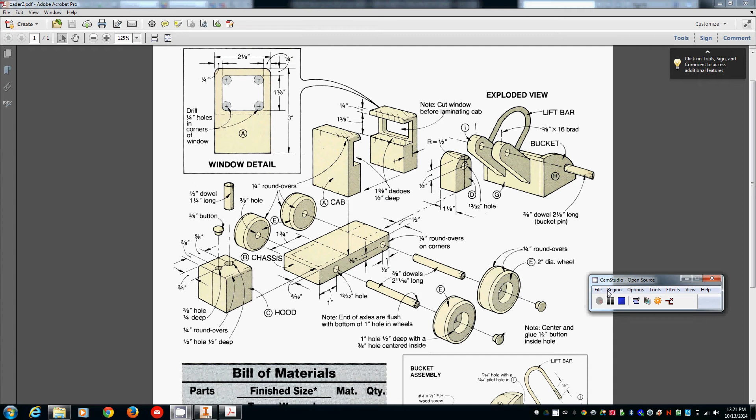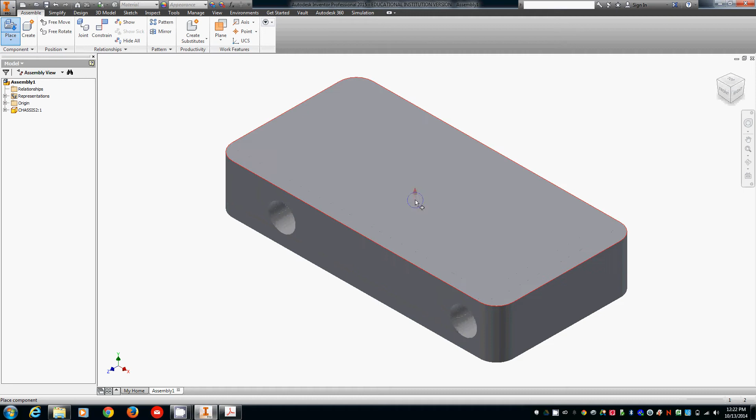In this video I'm going to show how to assemble the heavy hauler loader that all the parts have been made for. So we'll start with a new assembly in Inventor, and inside that assembly I'm going to place the chassis. I'm going to rotate my view to the same orientation that it would be in the drawing and set that as the home view.

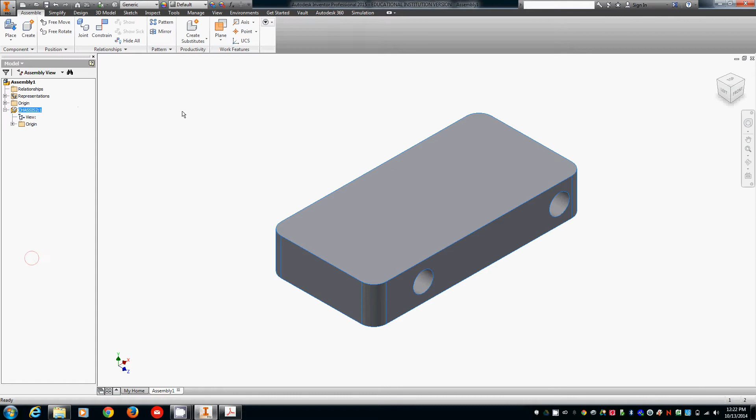And then also, if your settings do not have the first piece to be grounded by default, then you want to right click on it in the browser and make sure that it's grounded. That way that piece won't move around. Now I'll put the cab on top of the chassis. I made the cab as a single piece, so I have to find that. And place it in the drawing. Then I can assemble it with a few constraints.

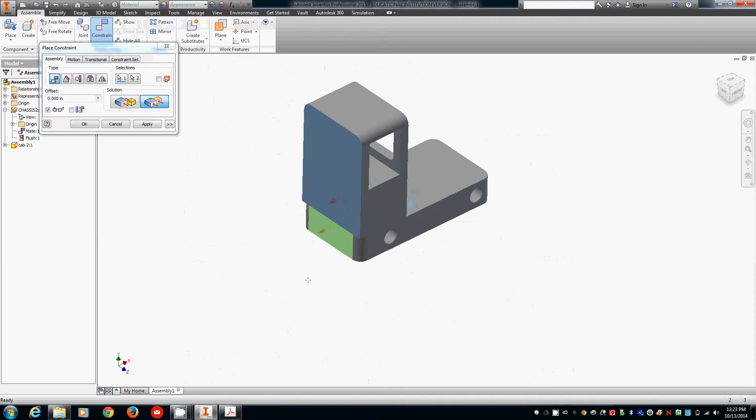I can do a mate constraint for the bottom of the cab to the top of the chassis, and then flush constraints for the side, and also a flush constraint to the back. However, it's not 100% flush constraint because it is 1 3/4 of an inch from the back. So I'll add a 1 3/4 inch offset, and that will place it where it needs to be.

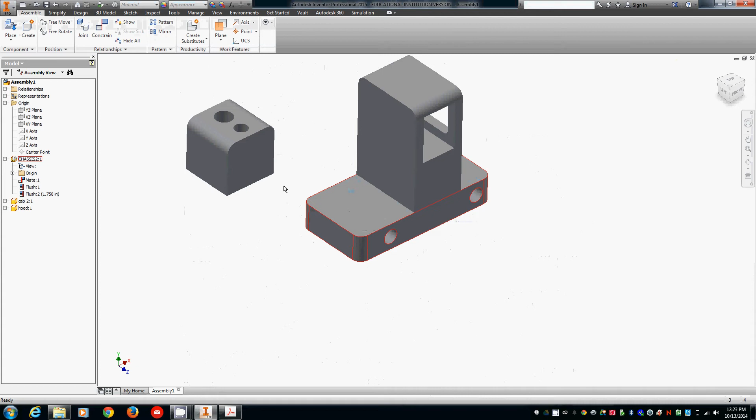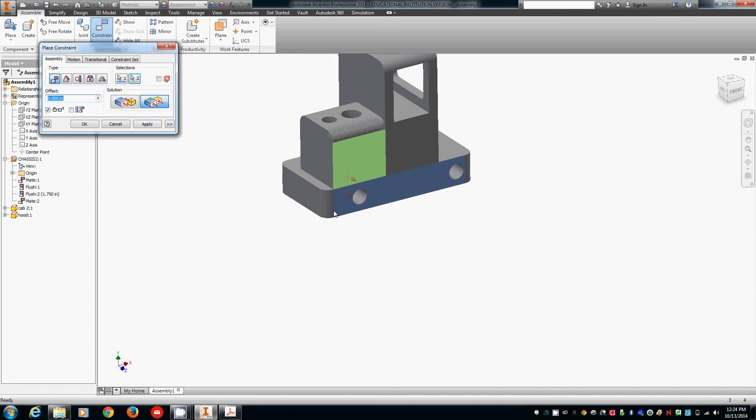Next I'll attach the hood. According to the plan, the small hole in the hood goes towards the back, and there is a 5/16 of an inch gap along the side, and it's mated to the back of the cab. So I will place a mate constraint on the bottom, onto the chassis, onto the back, and then a flush constraint with the side that's offset at 5/16 of an inch. If it goes the wrong direction, you simply can change that positive value to a negative value, and it'll place it where you need it to be.

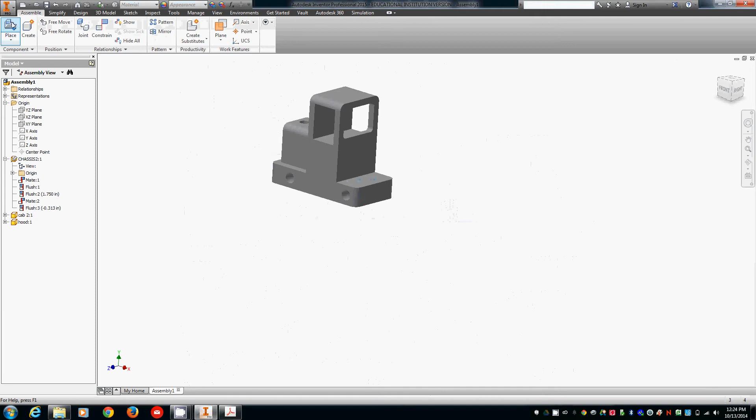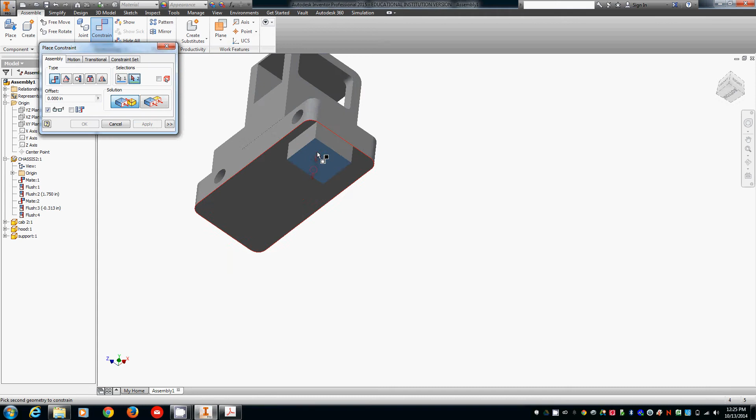And then rotating around to the front where the support goes. That support goes on the front, centered there, offset by 1/2 inch, and flush with the front and mated to the cab. And a 1/2 inch offset here.

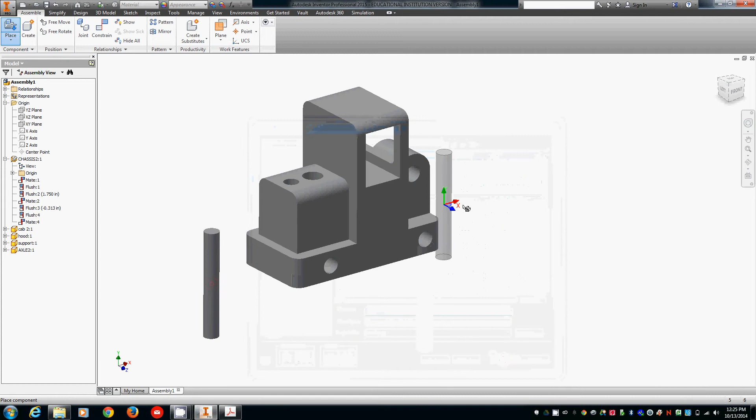Next I'm going to place axles and wheels into the chassis. So I'll get 2 copies of my axle. For this I'm going to use an insert constraint. An insert can either be opposed or aligned. I'm going to want aligned for this one, and it aligns 2 circular features along their central axis. So for instance, this circular feature is the end of the axle, and then the circular feature, the hole, it will align those along the axis.

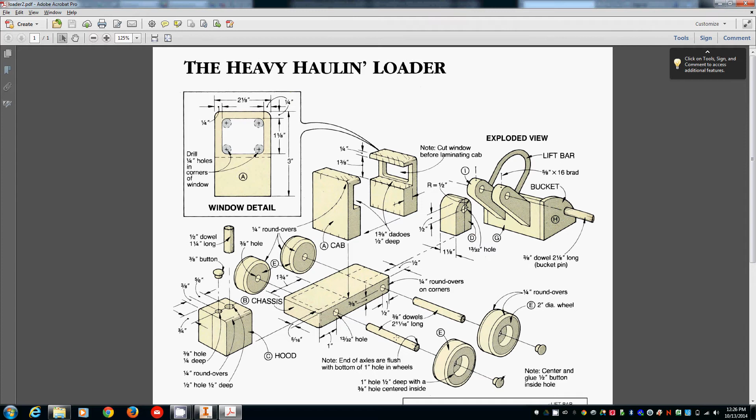However, it's too far. We need it to stick out on both sides the same amount. So looking at the diagram, the chassis is 2 1/8 inch wide, and the dowels are 2 11/16 inch long. So the difference between those two values divided by 2 will give the exposure on either side. So 2 11/16 minus 2 1/8 is 9/16, and 1/2 of 9/16 is 9/32. So I'll simply put in the value 9/32. If it goes in further than out, I simply need to put a negative in front of it. And that worked.

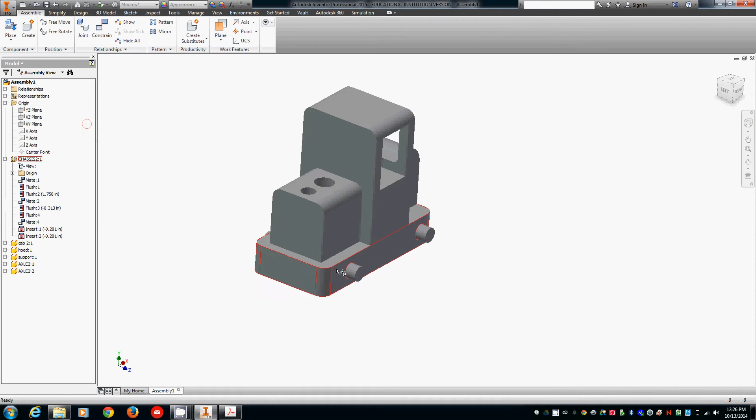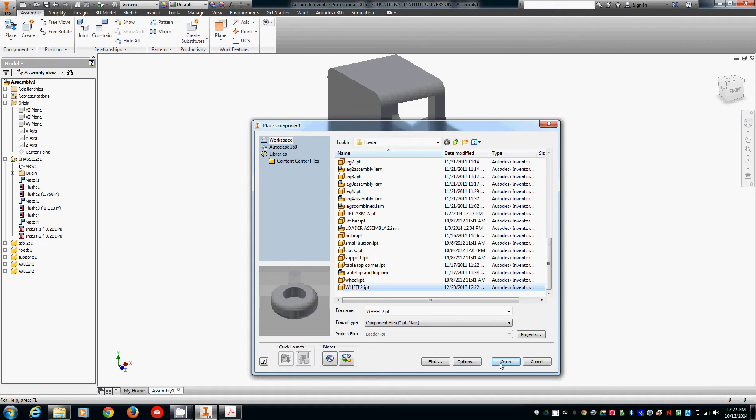Same for the other axle, and a negative 9/32. Now it's hard to tell because it's all one color here, but these axles are now constrained along the axis, but they can still turn about that axis. Now we'll do wheels. I need the wheel 4 times. And I'm going to use an insert constraint once again.

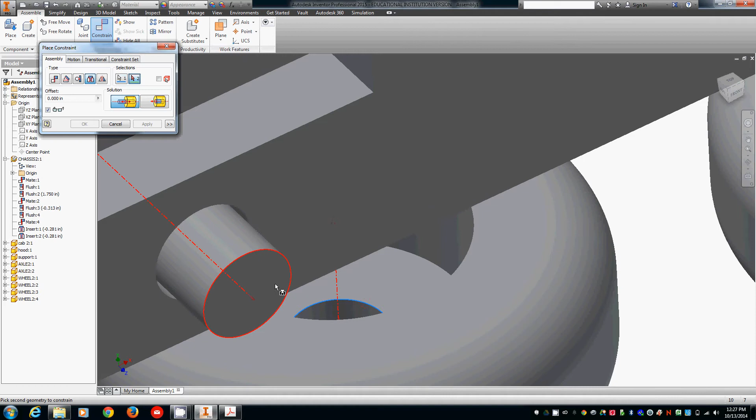You have to be careful though with something like the wheel to make sure you're choosing the right circular feature to align. So I'm going to choose this circle which makes up the inside of the hub and then the end of the axle here. However, for this one, again, I don't want an opposed, I want an aligned constraint. I'll do the same for the other 3.

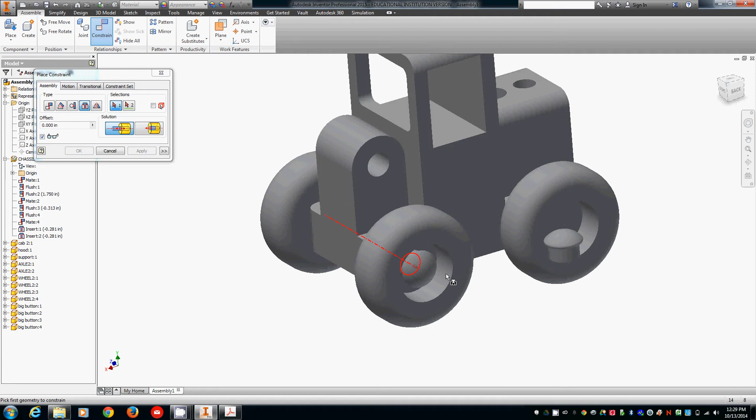Now I'm placing the buttons onto the wheels, which act like hubs. They are assembled with inserts as well. I've done 3 of them already. This time, however, it is an opposed insert constraint. And it's as if you were gluing these buttons right onto the ends of the axles. So I'm choosing the circular feature that's the bottom of the button, and then I'm choosing the circular feature that's the end of the axle or the center of the wheel. Either one actually would work. And that will align it right where it's supposed to be.

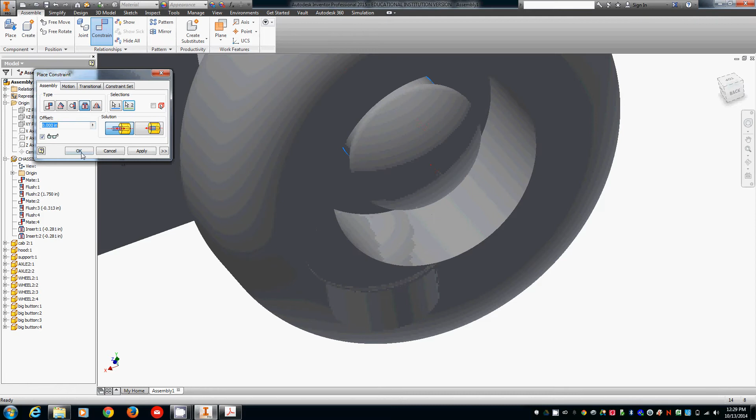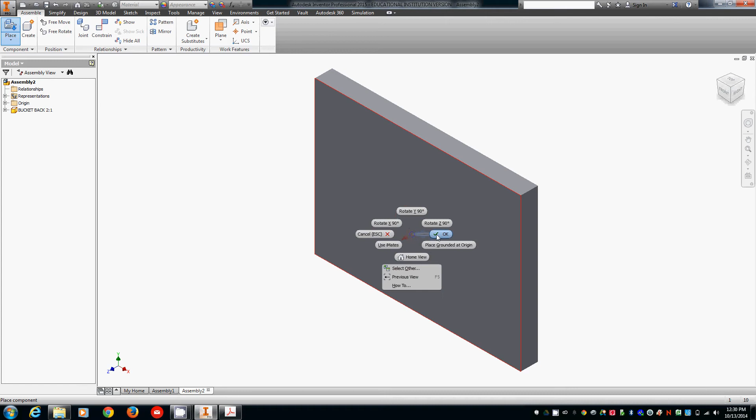And in here I'll start with the back of the bucket. Then I will place the bottom of the bucket. Looking at the assembled view, or looking at the directions for the bucket, note that the back extends to the bottom of the entire bucket, while the back extends to the bottom, while the bottom piece goes flush with the bottom of the back.

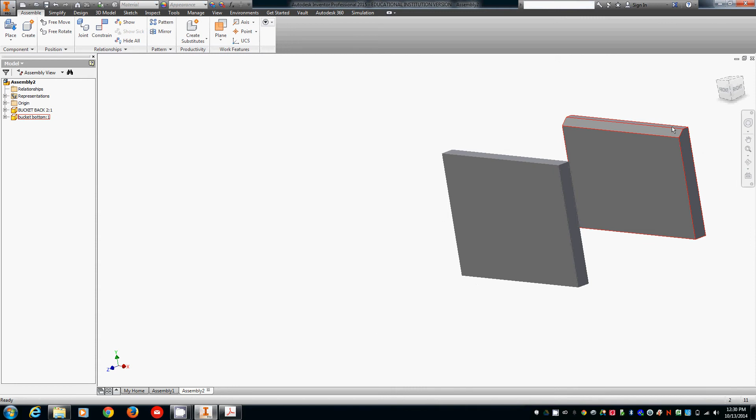So notice there's a chamfer on the front edge. I want to make sure that's facing the right direction. But then I will constrain the bottom of the bottom to this side of the back. Then a couple of align constraints will finish it up. Align the sides and align the bottoms.

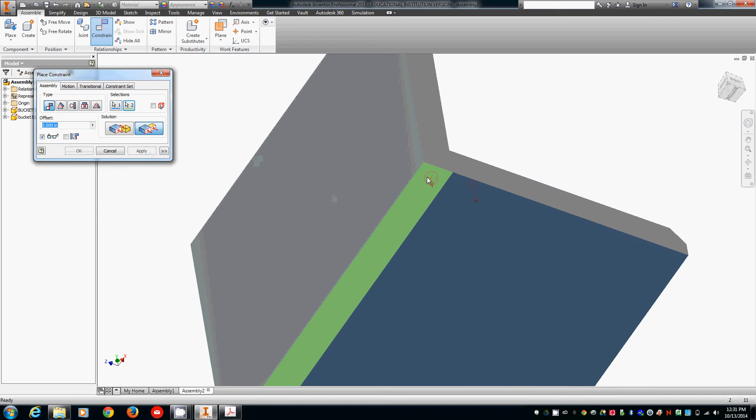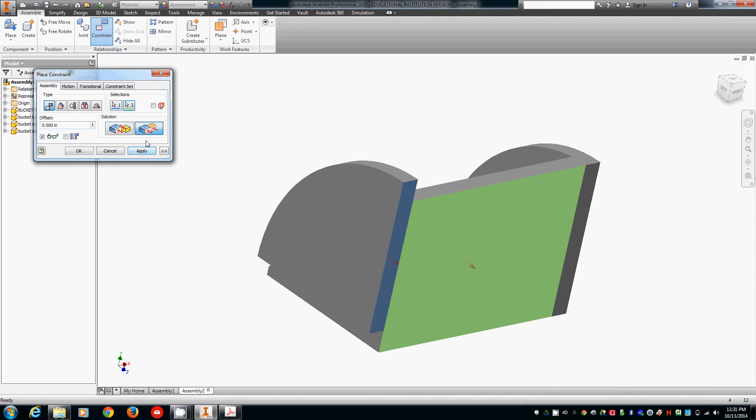Now 2 copies of the bucket side. These can be assembled with mate constraints and flush constraints. And then the bucket arms, I need 2 of those.

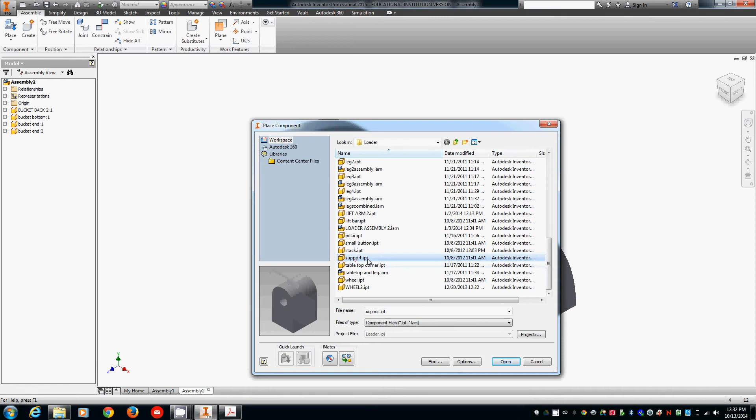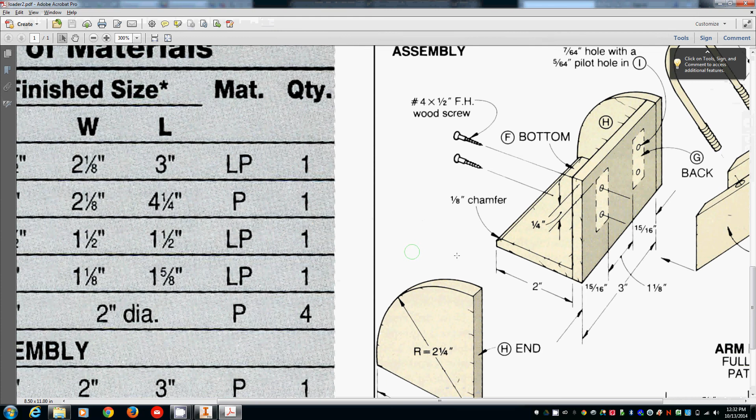Now I can start with a mate constraint to the back, but then I need to figure out where I'm going to constrain them. On the diagram, we can see that they are 1 1/8 inch apart, and they are 15/16 from the end of the back to the inside of the face. They are also 1/4 inch down from the top.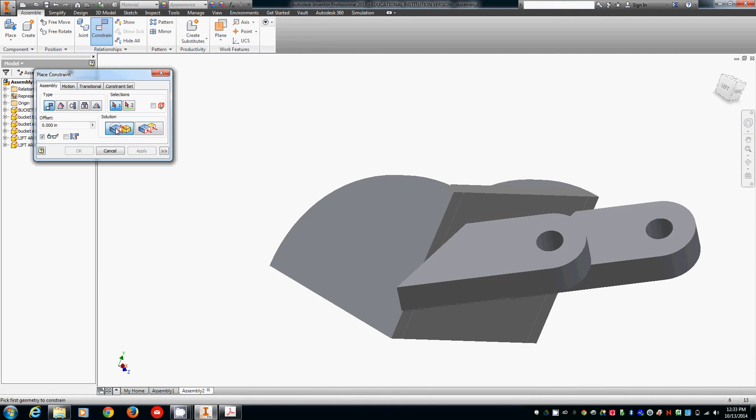So I'm going to use that 15/16 measurement. It will be a mate measurement from the inside of an arm to the end of the back. Now it's a little bit hard to select the back here. One way to do it is to get really close here and get this little triangle that's showing. But now it's mated there, and I need that offset of 15/16. If it goes the wrong direction, as always, I'll put a negative in front of it.

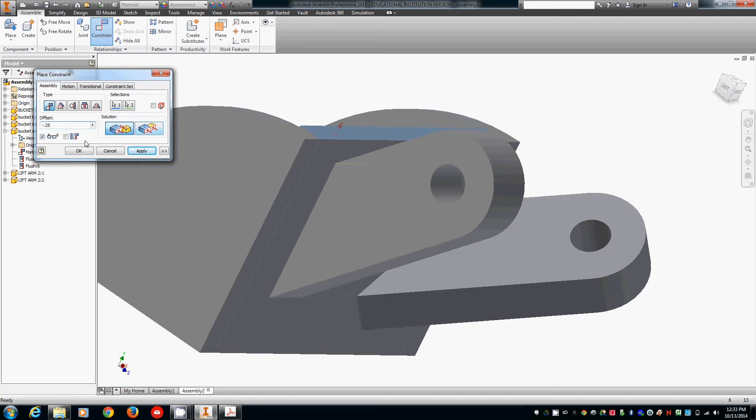And then I need it to be 1/4 inch down from the top. I'll do that with another mate constraint from the top, but this time I'm just going to select the top edge of the lift arm here. Then I can set it at 1/4 inch down from that. I'm just realizing that I did not constrain my first piece, so I'm going to go back in here to the back and ground that.

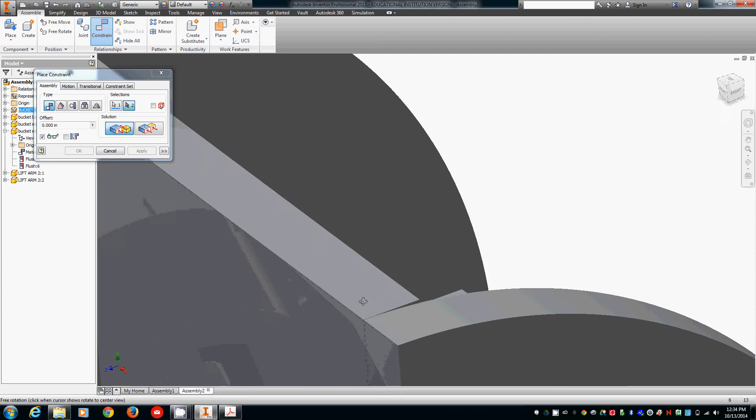Now the other piece I can do the same way for the bucket arm. A mate from the inside to the outside edge of the back. Another way to select the outside edge of the back is to hover over where it would be in space and then right click and choose Select Other. And that allows me a drop down here to choose different faces, and the one I want here is face 3.

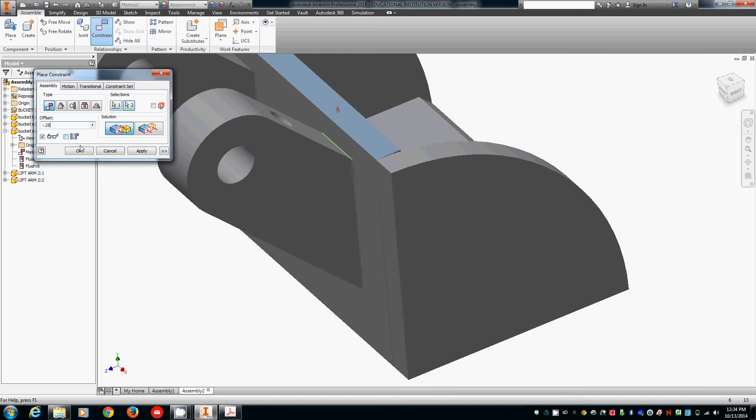An offset of -15/16, and then a mate from the top edge to the top of the lift arm of -0.25. Now the arms are fully constrained. So I can save that as bucket assembly.

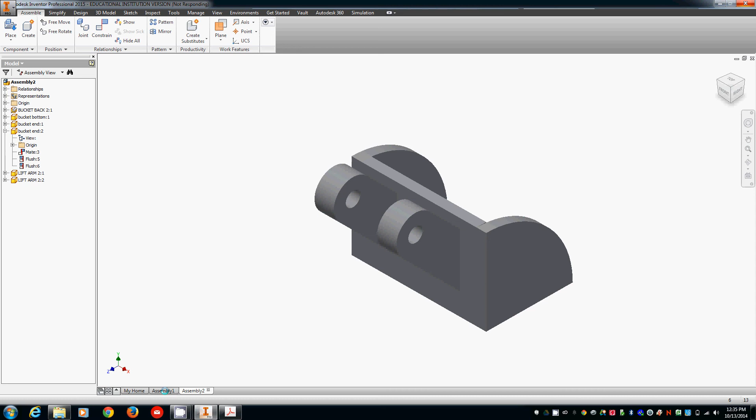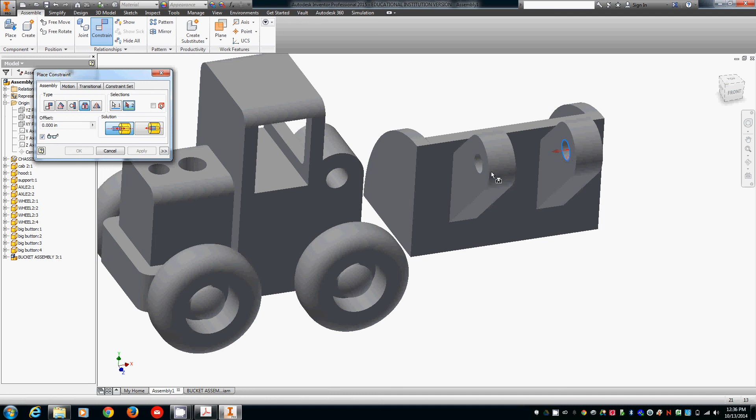And then in my other assembly, I can insert this bucket assembly as a part, or as something to be assembled. So I go to Place, and now choose my bucket assembly and place it into the model. And I'm going to use another insert constraint. I'm going to use the inside edge here of this hole to the hole on the support here. And that places it right in place.

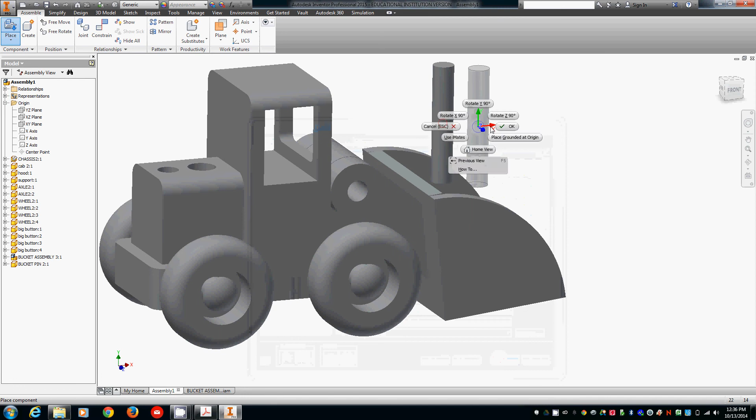It is fully locked in place, however, we're still missing one thing to assemble. The pin that goes through here. So I will place a bucket pin into the model and then use an insert constraint to put it in the hole, and that part is in.

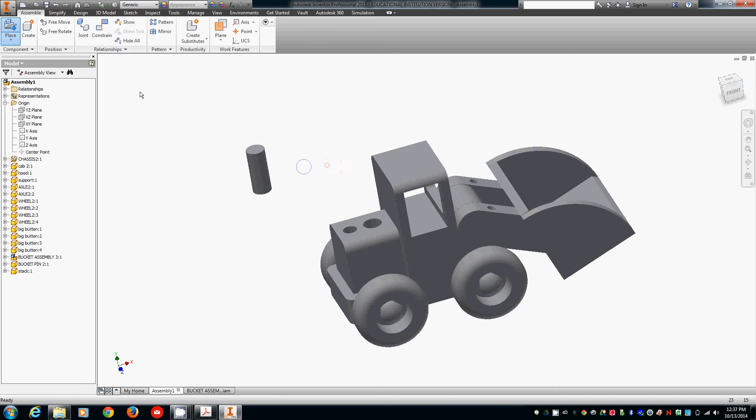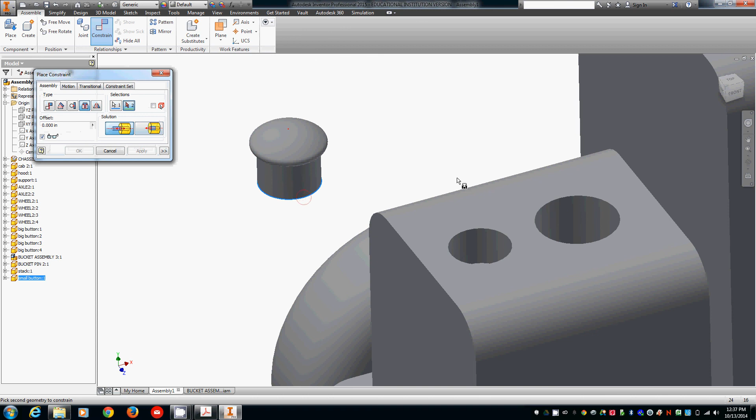And almost forgot one or two last things, the smokestack and the button on the hood. So I will go and place both of those in. For this I'm going to choose with an insert constraint the bottom of the button and the bottom of the hole, and same for the stack.

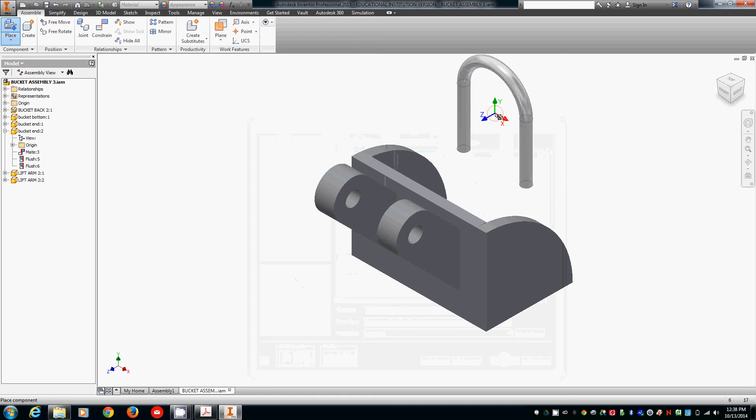And now the loader. Oops, not quite fully assembled. One more thing. The lift bar on the loader, on the bucket. So I'm going to go back into the bucket assembly and I'm going to place the lift bar in. Can assemble this with an insert constraint to the bottom of the hole.

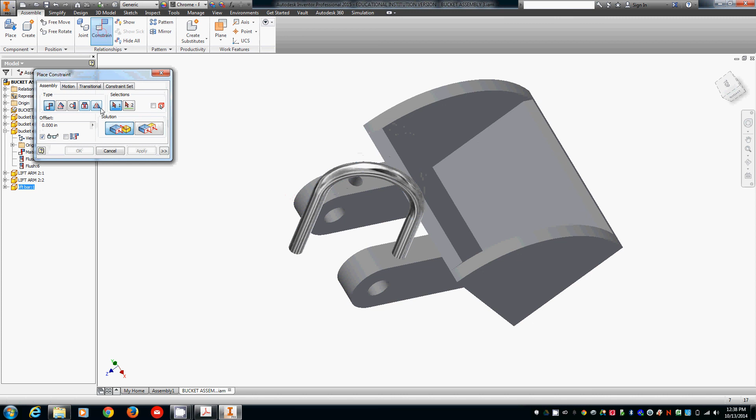And when it goes in, it may look like it's fully secured, but if I grab it, I can actually pivot it out of place. So I need to use a second constraint to get it in. Now if you didn't get everything exactly right for the dimensions of the lift bar or where the placement of these lift arms go, that won't work. It'll give an error. So if you do have an error, that's probably what the problem is.

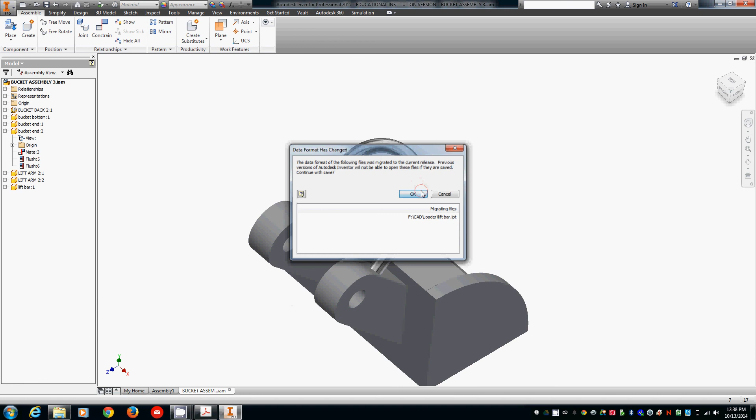Now I should be able to save this, and it should update in my other assembly. And there it is. So that's the fully assembled loader.